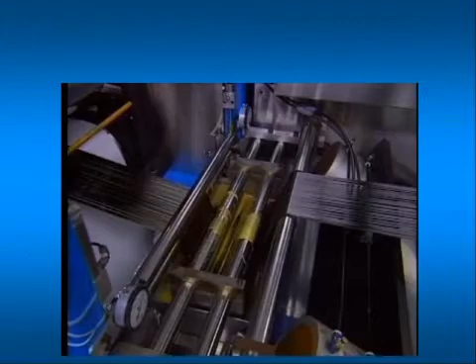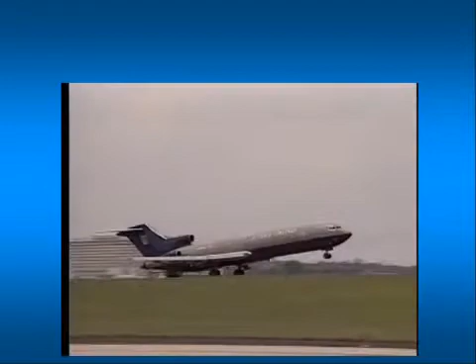Next, we will talk about composites and composite structures. Composites can be defined as a combination of two or more materials working together. Each contributes its own structural properties and each retains its unique identity. Composites synergistically combine these two materials into something much better.

Wood is a natural composite and consists of fibers reinforced with resin. Wood has very similar protective properties to composites. It does not corrode, it has very high fatigue life, and it has a relatively low radar signature.

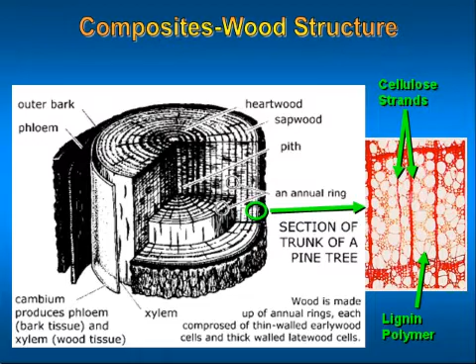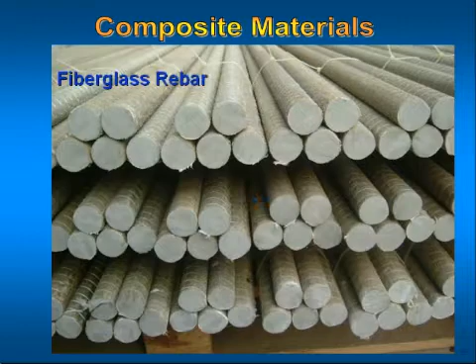Non-metallic materials, also known as composite materials, offer many advantages over other materials. Within aerospace markets, where exceptional performance is required but weight is critical, composites continue to grow in importance.

Some of the many advantages of composites are stronger and stiffer than metals on a density basis. For the same strength, they are lighter than steel by 80% and aluminum by 60%. Highly corrosion resistant, most composites are essentially inert in the most corrosive environments. Outstanding durability. Well-designed composites have exhibited apparent infinite life characteristics, even in extremely harsh environments.

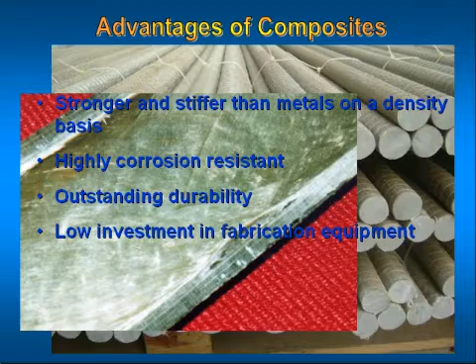Low investment in fabrication equipment. The inherent characteristics of composites typically allows production to be established for a fraction of the cost that would be required in metallic fabrication. From virtual to real is the track that aircraft follow.

Here the Boeing 787 Dreamliner takes shape. Its fuselage, made of composites, consists of 4 cylindrical sections. Composites, because of their lightweight and strength, are gaining favor as a material for aircraft.

The Boeing Company's 787 Dreamliner, officially unveiled on July 8, 2007, has become the poster child for composites in aircraft design because the design uses materials extensively. According to Boeing, composite materials constitute about 50% of the aircraft by weight.

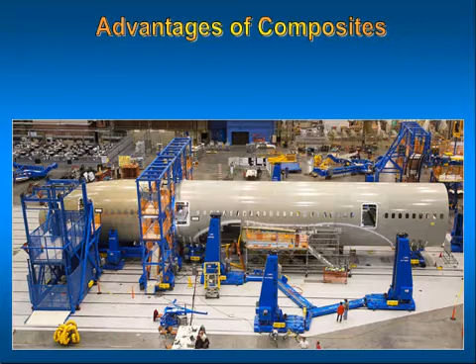Several composite materials used in the aerospace industry are carbon graphite, fiberglass, Kevlar, and thermoset plastic.

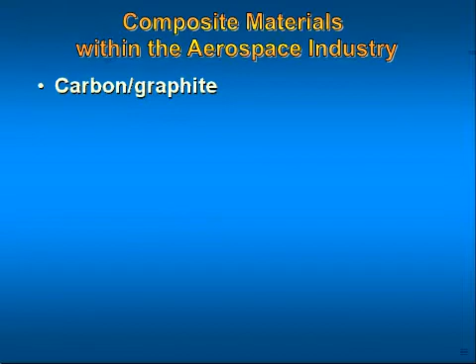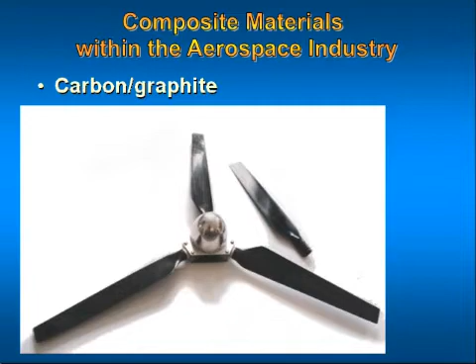Carbon graphite fiber composites are noted for their stiffness and high compressive strength. One of the problems with carbon graphite as a structural material is the fact that aluminum alloys in contact with it will corrode. For this reason, fasteners used with carbon graphite must be made of corrosion-resistant materials such as titanium or corrosion-resistant steel. Fiberglass: there are 2 types of glass fibers used in aircraft composite structure, E-glass and S-glass.

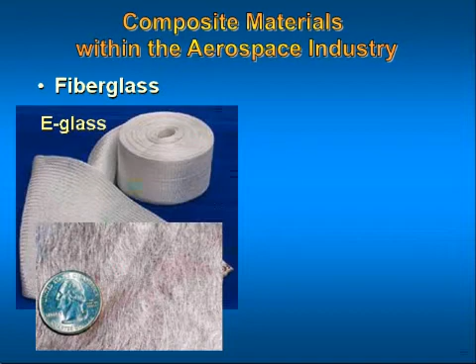E, or electrical glass, has a high resistivity and is designed primarily for electrical insulation. Its low cost makes it the more widely used type of glass where high strength is not required. S, or structural glass, has a high tensile strength and is used for critical structural applications.

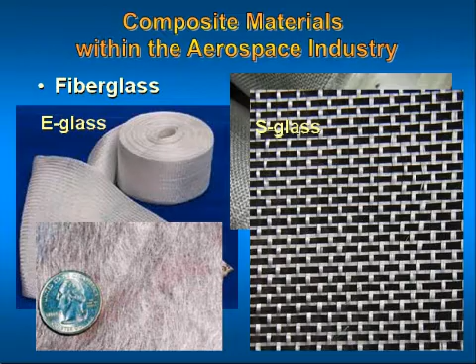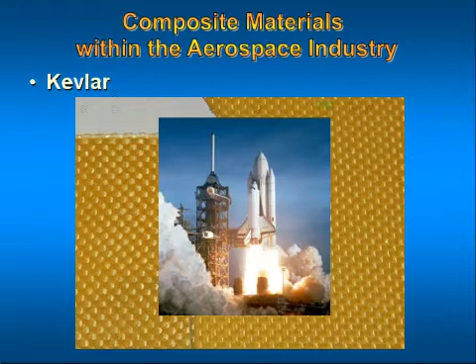Kevlar is an aramid fiber that is noted for its flexibility and high tensile strength. It does not conduct electricity and does not cause aluminum to corrode when held in contact with it.

Thermoset plastic is a class of plastics that, when cured by normal thermal and/or chemical means, become substantially infusible and insoluble. Once cured, a thermoset cannot be returned to the uncured state. Some of the more common thermosets include epoxies, polyurethanes, phenolic amino resins, and polyamides.

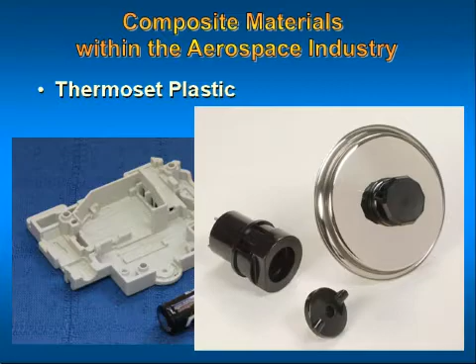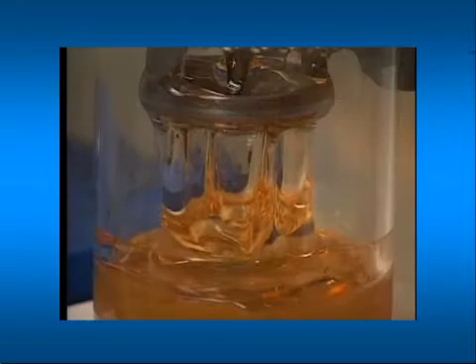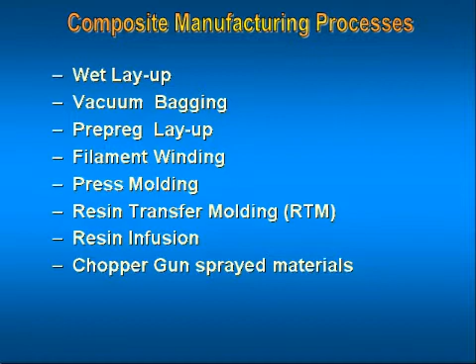This section is designed to familiarize you with the materials and processes associated with the aerospace industry. Next, we will talk about some of the composite manufacturing processes used in the industry, such as wet layup, vacuum bagging, prepreg layup, filament winding, press molding, resin transfer molding, and resin infusions.

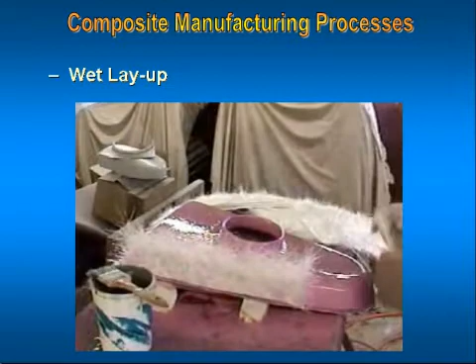Wet layup: the manual wet layup is the oldest and simplest composite technique. It usually requires use of a tool or mold and requires a release agent. The surface can be wet or sprayed with resin or a gel coat.

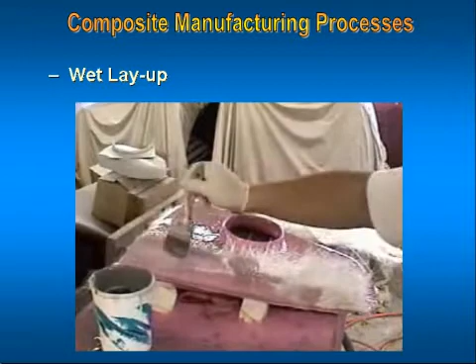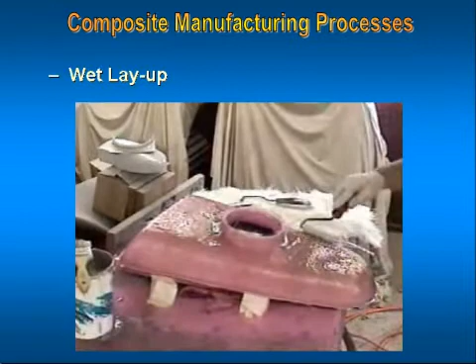The gel coat is allowed to partially cure before the addition of fabric. The fabric can be applied dry, saturated with resin, or sprayed with chop gun. Excess resin is then removed by hand working.

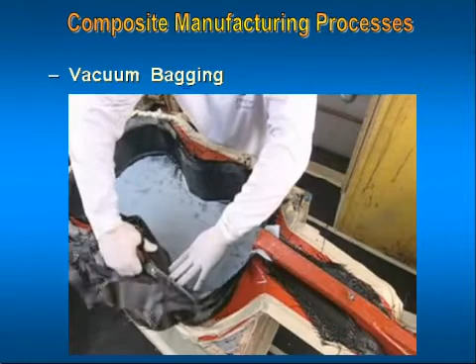Vacuum bagging is a technique employed to create mechanical pressure on the laminate during its cure cycle. Pressurizing a composite lamination serves several functions. First, it removes trapped air between layers.

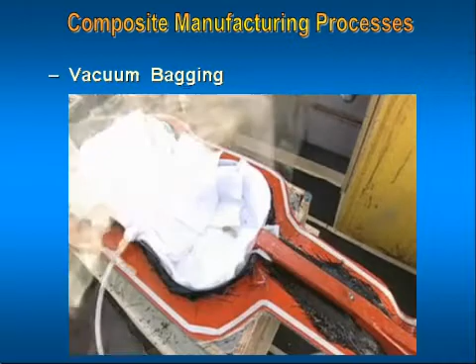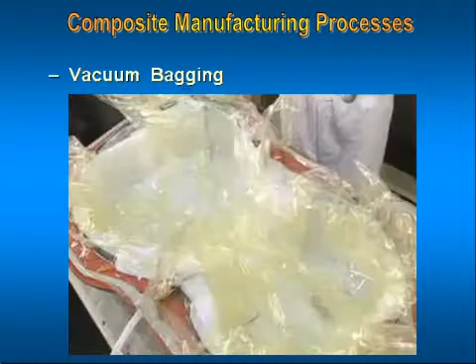Second, it compacts the fiber layers for efficient force transmission among fiber bundles and prevents shifting the fiber orientation during cure. Third, it reduces humidity. Finally, most importantly, the vacuum bagging technique optimizes the fiber to resin ratio in the composite part.

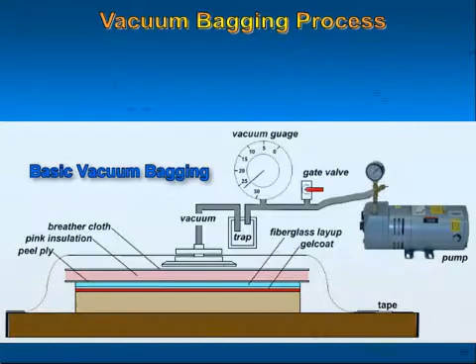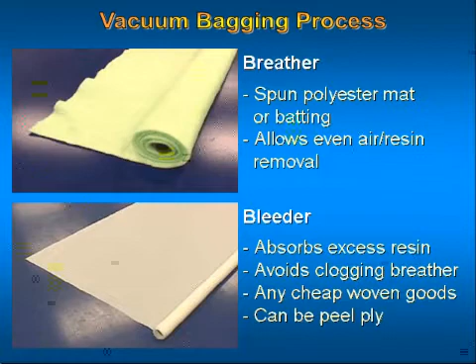This is an example of a vacuum bagging process. In the vacuum bagging process, you will normally use a bagging film, release film, breather material, bleeder material, and peel ply. A caul plate is placed in immediate contact with the layup during curing to transmit normal pressure and provide a smooth surface on the finished part.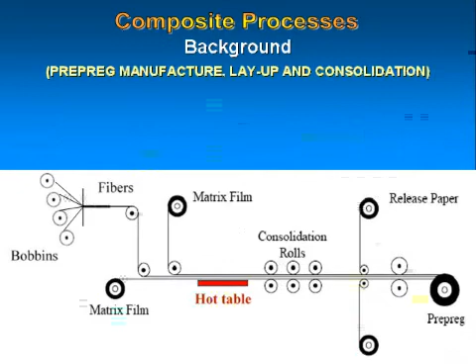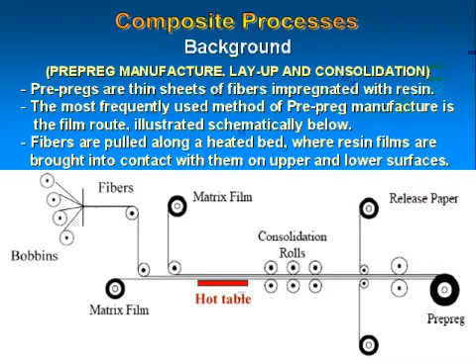Pre-preg material can be used in the vacuum bagging process. Pre-preg fiber is pre-impregnated with resin, hence the name. In this diagram, lay-up involves the cutting and stacking of pre-preg layers in a predetermined sequence of fiber orientations. The matrix resin is cured by exposure to a defined combination of temperature and pressure.

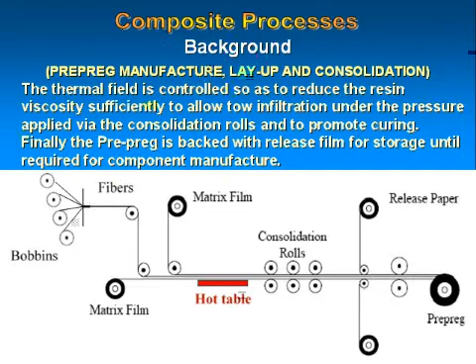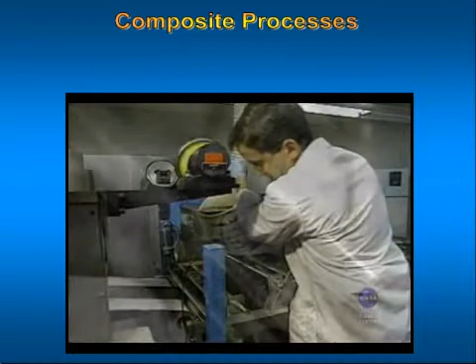This diagram shows how pre-preg fabric is manufactured. The fibers and matrix film are joined together, heated, and then rolled with release paper to keep it from bonding. Pre-preg must be stored at below 0 degrees Fahrenheit, and its shelf life is only up to 1 year.

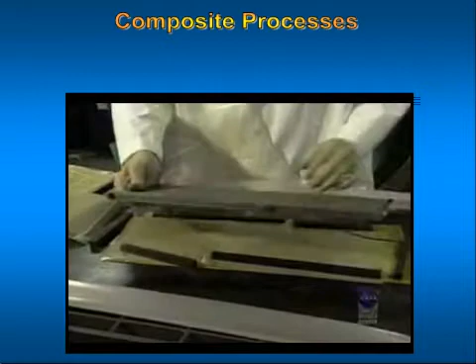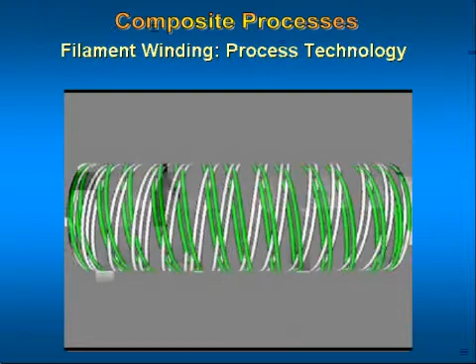With filament winding, a large number of fiber rovings are pulled from a series of creels into a bath containing liquid resin, catalysts, and other ingredients such as pigments and UV retardants. Fiber tension is controlled by the guides or scissor bars located between each creel and resin bath.

Just before entering the resin bath, the rovings are usually gathered into a band by passing them through a textile thread board or stainless steel comb.